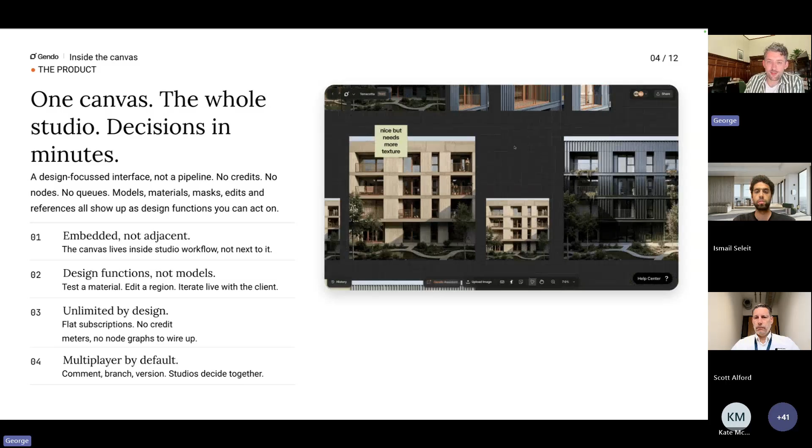As I said, it's unlimited. There's no credits in this. We find that sort of stunts the process. So you can generate as many times as you like, and it's all about working collaboratively in that process.

So again, to talk about the problem, image production can take a very long time, 2 to 3 weeks. It can be very expensive, and then getting people to understand what you're up to is difficult. We already have users who are cancelling other software subscriptions they have to manage this sort of process, using Gendo to replace that. So hopefully cost effective as well for you.

Interestingly, one of our users is now selling the images they make. It's a line item on their invoice saying you've got images as part of your design process. So they're profiting off of a Gendo subscription, which is awesome to see - that people are using it for that actual professional context.

Origin Design Studio is a small studio in the north of England, and I'll show you one of their planning applications where they use Gendo images on their project. So we'll talk about that in a little more detail.

There are lots of AI models out there now. Any of you who have tried will know it's an increasingly explosive number. When we started Gendo back in 2022, there was maybe 3 to choose from. If you look at any of these repositories now, there are sort of 5,000 models that you could be using for any given moment.

So the way we handle it is that we test all these things. Ismail particularly tests all these things and finds the architecturally relevant use cases, and then we train them further to be fit for purpose for those functions, and then we include them in design-oriented features.

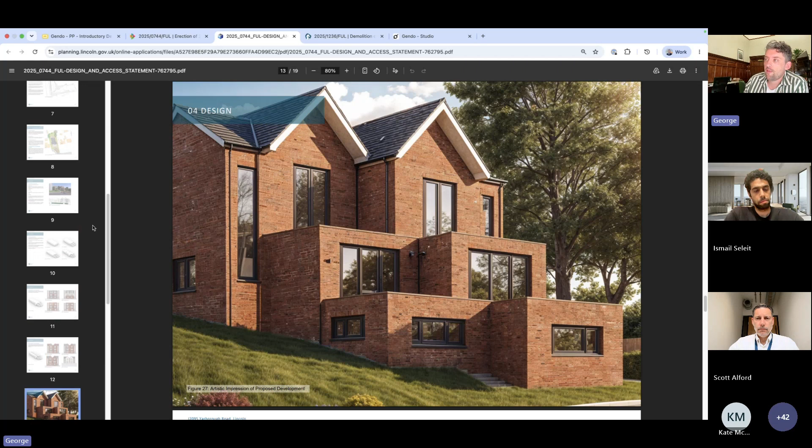The Origin Design Studio told us that this was a contentious project, that they had been in a few meetings with their planning officer and having to go back, make changes, come back a few weeks later to have that conversation. They've done that 2 or 3 times already. And in this final conversation, they had shown them these images as part of it, and that was helping get the understanding and the alignment with the planning officer.

But it was only when they sat down with the planning officer in the room on Gendo and made some changes live, and said, okay, we want to make these changes to the material finish of the facade, what would that look like. Rather than spending 2 weeks going away to redo those drawings, those images, they just hopped on the platform, regenerated it in the room, and got approval there and then. So they saved themselves a huge amount of time just by iterating and using the platform in the room, which was a super awesome use case for us to hear.

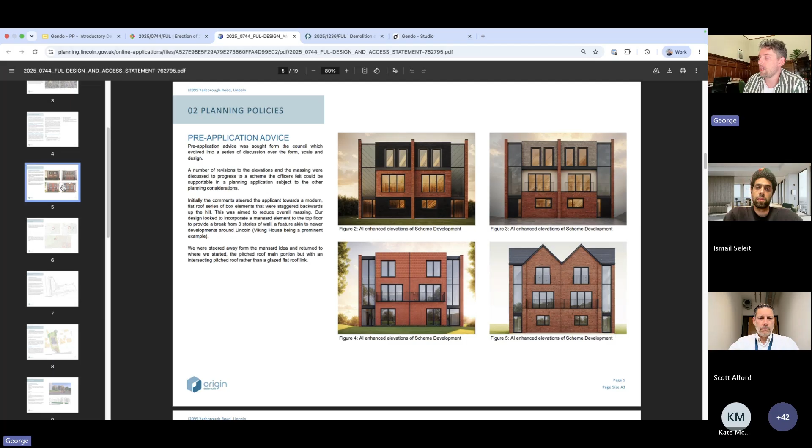Another older application now is a house in Somerset where they had done some concept materials. There are 2 applications, but this first one is not available, let's try a different one... sorry, this was loading earlier. Well, that's very helpful. Okay, we won't look at this one, but essentially a similar story.

They had their applications, they had a perspective view of the building in context and had generated the materiality and the lighting, but the planning officer said that they didn't like the skylight, the window in the roof, so they had to regenerate that image, making that very specific and controlled change, and then resubmitted it, which got them the planning application, and everyone knew exactly what they were approving. So another example of this being a tangible thing in building delivery, not just pretty pictures at the beginning of a project, but something that had impact on the process and the success of this planning application.

I'll pause there and maybe hand over to Ismail, who will take us through the actual platform.

Yeah, thank you, George. It's time to jump into the platform and do a quick demo. I'm planning to do everything live with you guys. I have some prepared assets, but it's always nice to try things live. So before I start, George, Scott, Kate, please interrupt me if there are any questions, or if you have any questions also. Sometimes I get so much into generating things. Please interrupt me at any time.

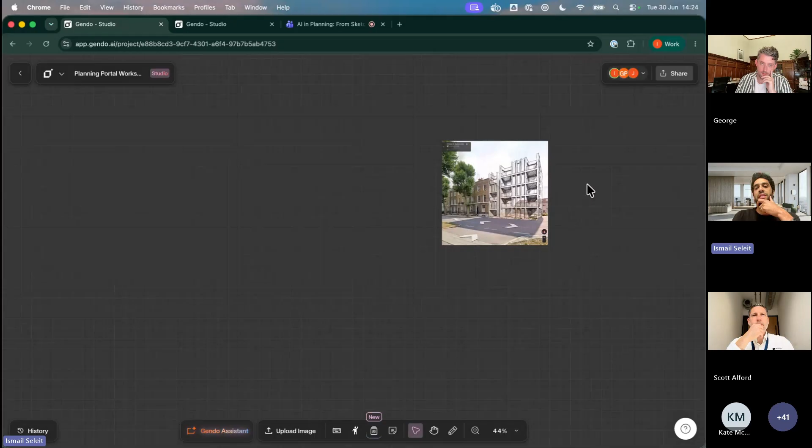As you can see, it's loading now. This is a very speculative image that I made. This is not a real place or anything, but it's just a Google Street View, let's say, of a place where I added like a sketch, sort of tracing paper sketch on top of the empty plot that I have here. And I want to start iterating on that, basically.

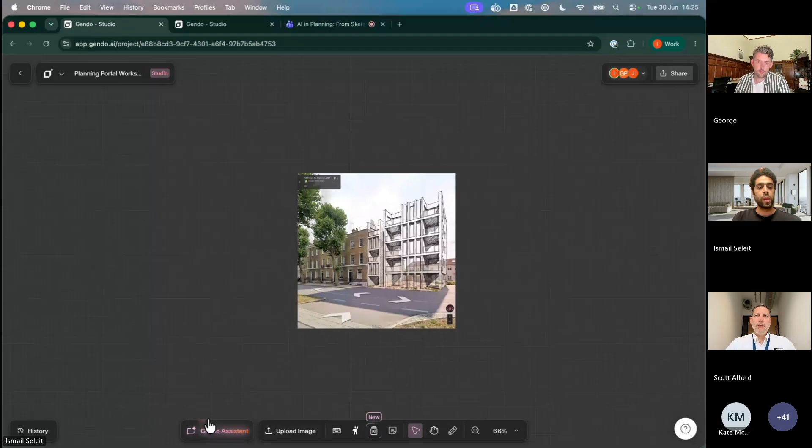So the first thing I'm going to do is I'm going to use the Gendo assistant. If I select the image, we have some contextual functions that I will be going through later on, but I want to start simple. So the Gendo assistant basically is an AI assistant that will be helping you throughout the Gendo interface, but also helping you with like design ideas.

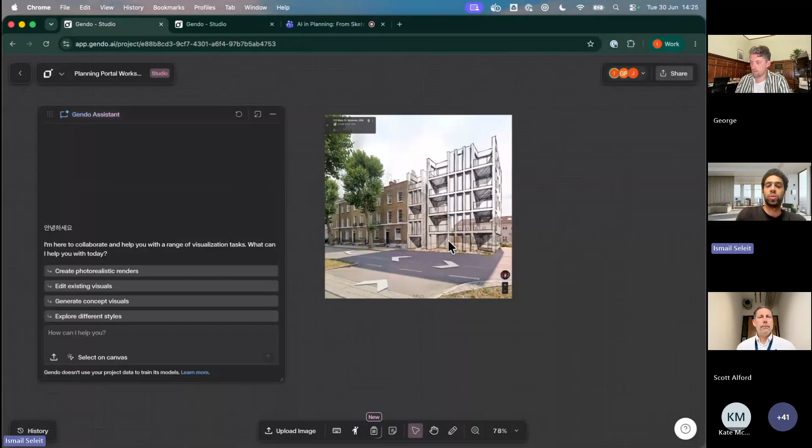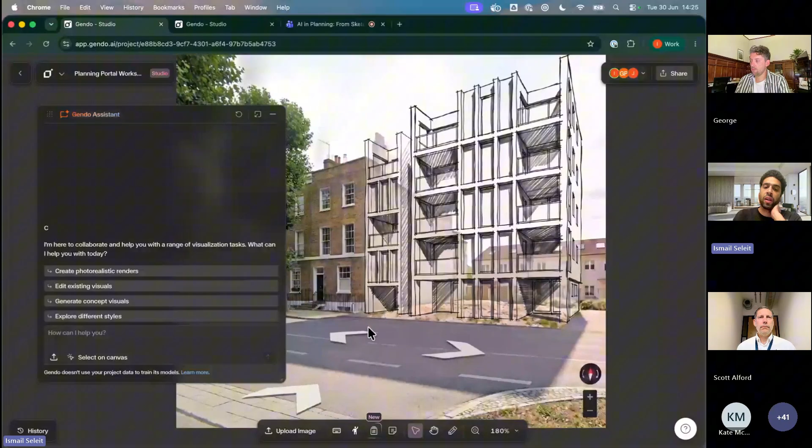So usually when you start these projects, you don't have like a super clear idea about what you want to do. You don't know exactly like what to prompt, which function to use. You just have some design ideas that you want to try out. So for example, in this sketch that I made on top of the Google Street View, I kind of like how the massing looks, but maybe I want to edit a bit the railing, which is kind of random right now. And I want to try like let's say a simple vertical sort of railing here.

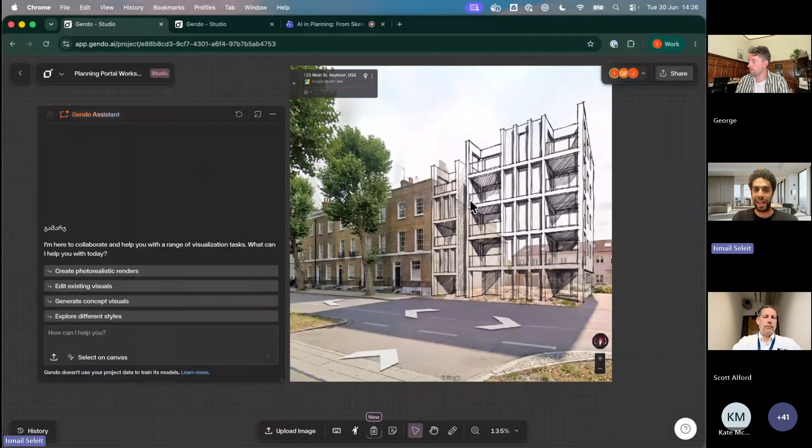So instead of going back and sketching everything, I can try to do these sort of edits with the Gendo assistant. So I'm just going to drag and drop this image here inside the Gendo assistant that I opened. And before starting, I like to give it context.

Yeah, give it context about what I'm trying to do here. So I will just tell it first thing that throughout this conversation, I want to only edit the sketched building while maintaining the sketch style. Yeah, I can see George is already generating some stuff on this board, which is great. So right now I'm just setting the context that basically will help me edit these railings before like jumping into design decisions. I'm just setting the scene for it.

And right now, as you can see, it starts inspecting the image, so it starts understanding what this image is composed of, and it starts suggesting things for me already. So it says, yeah, I understand, but starts asking me what would I like to change about this sketch that I have here, and it gives me some options. Yeah, modify the height, change the pattern of the balconies, add or adjust. I'm not obliged to pick any of these, also because I didn't mention that.

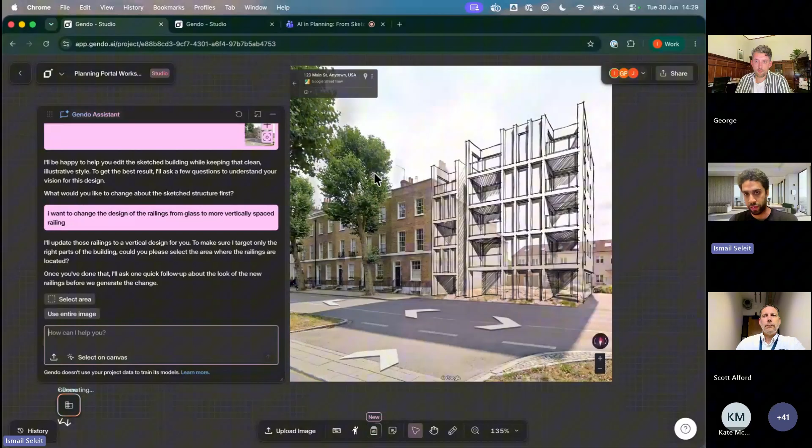This is an important question, because sometimes if for example I'm changing the time of day from day to night, this is an edit on the whole of the image. So I'm changing each and every pixel of the image, let's say. Whereas for this design task, I would say because I'm editing only a portion of the image, I'm going to go ahead and select the area.

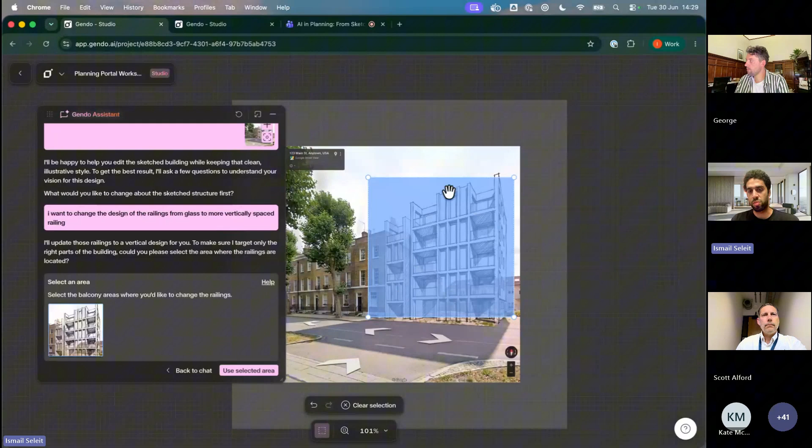So the area is roughly, this needs to be quite rough. It's nothing like precise. It's roughly around this area. I think this covers most of the railings that I have. And I'm just going to click use the selected area.

It's asking me a little more about the division of these vertical railings - whether they're closely spaced, wider, or minimalist. I'll go with closely spaced, but let me hit edit since you can edit these options. I'll add some detail just to make sure they're compliant. The AI won't make them 100% compliant, but at least while creating the spacing it has an idea of the range it should follow.

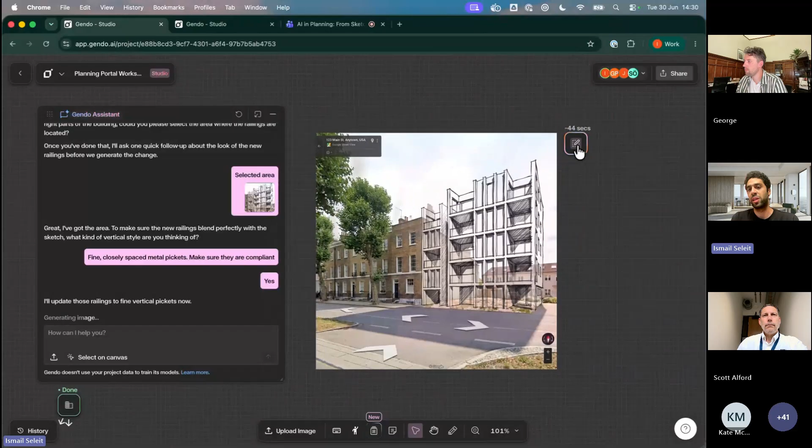So right now the assistant came up with a plan for me to generate. If I'm happy with this plan, which I think I am, I'll just hit generate. And right now it's going to create a task that sends it to the AI model to do this edit.

So just to recap, up until this point all I've been doing is thinking about my design ideas and intentions, trying to communicate them well to the Gendo assistant. I started by adding the image and setting the scene - giving it the context of what I want to do, which is basically edit the sketch. Then I told it my design intention without being too specific. Yeah, I was a little vague. It's done now, but let me continue with the recap.

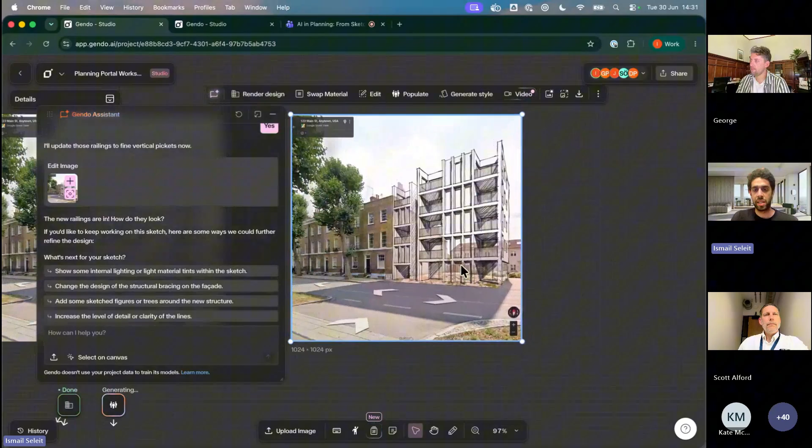So I was vague about my design intention - I just said vertically spaced railing. It came back with some suggestions: first, to select only the portion or area I want to edit, and also how spaced I want these railings to be. I picked an option and added some information for it to give me the ideas I have in mind. As you can see, it edited all the railings to fit my intention while following all the instructions I gave it. So I think we're off to a good start.

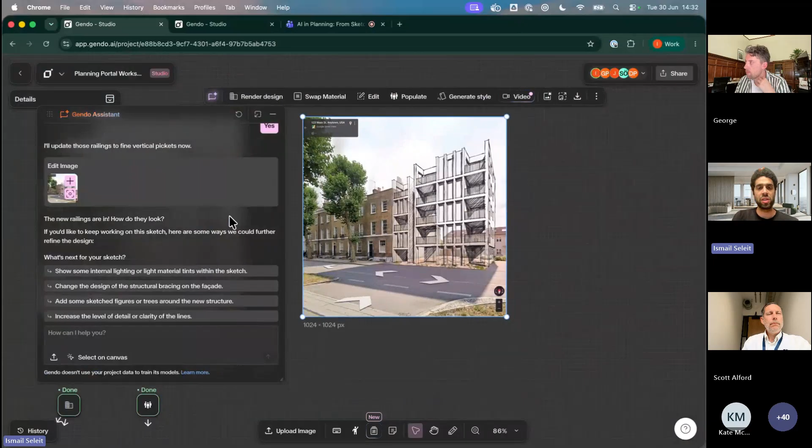I could go a little further adjusting this sketch, trying out other design ideas, but just for the sake of the webinar today, maybe now is the time to actually try to render it and make it a little more realistic.

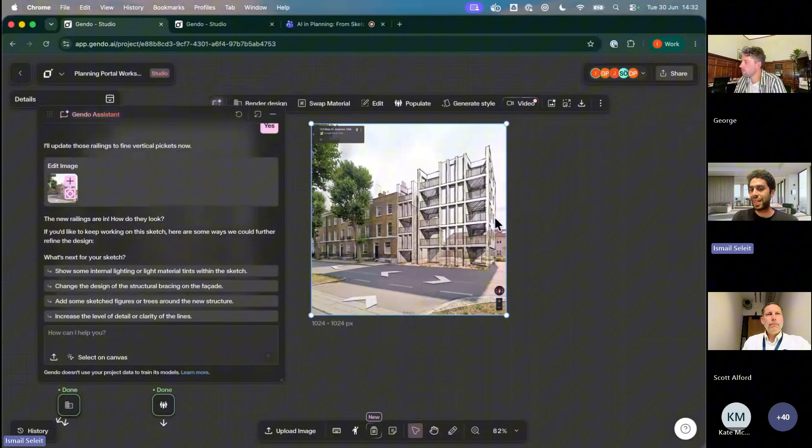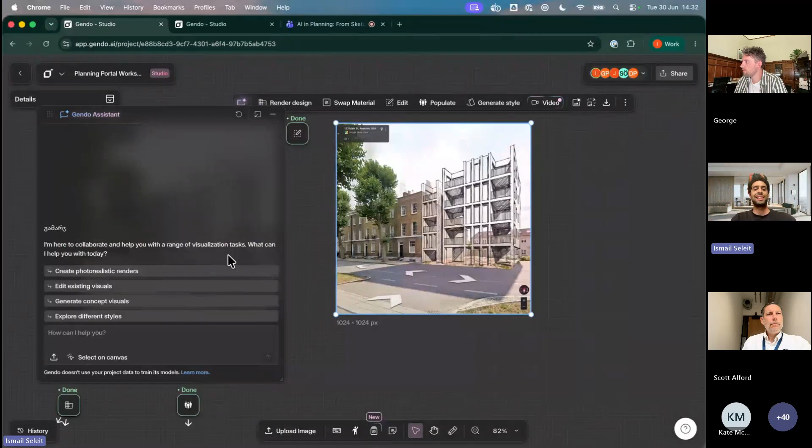Since I'm done with this chat, I'm just going to reset it. I'm done with the editing of the sketch, so I'll reset this chat - it's always good to reset once you're done with a task. Right now I want to render this to be a realistic building inside this context. I also have a material sample, an image of the materials I want to use, that I dragged and dropped in.

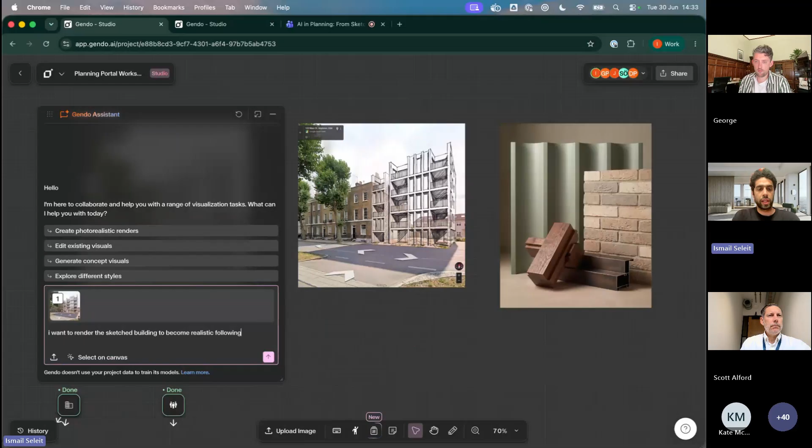So for this task, I'm just going to drag and drop the generated, edited image and tell it the new task. I want to render the sketched building to become realistic, following the lighting and atmosphere of the surroundings, and make sure you capture the design intent. This could be anything, really.

And then, like the previous example, the Gendo assistant starts to inspect the image and tries to understand what's within it, along with my request. It reasons through my request and asks me to ensure the final image matches my vision for the materials and quality. It asks if I have a reference image for that, and I actually do.

So I'm going to drag and drop this reference image in and tell it to use these materials - for example, the green fluted material as the material for railings, since we're doing railings right now. And then I'll send this over.

I think George already finished the project over there - I can see him generating so many things, but I'm trying to take it step by step here. If you have any questions up until this point, please do interrupt me.

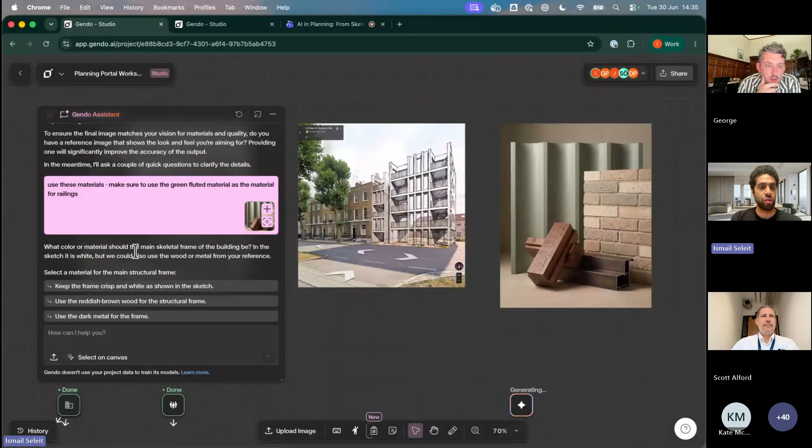And as you can see right now, it's following up with some questions: what color or material should the main skeletal frame of the building be?

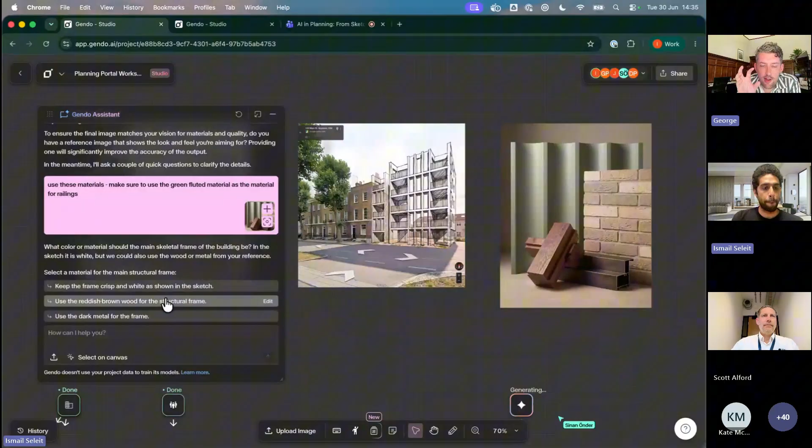A question for you, Ismail, just while that's generating - you've got a great image of an abstract material palette there to apply, but what are the other kinds of reference images that might work well?

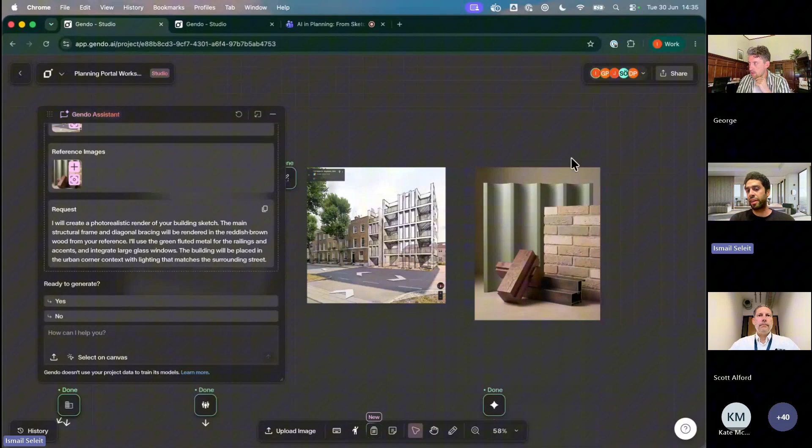Yeah, that's a really good question. So any sort of reference image of buildings as well - the AI model will be able to extract materials and atmosphere from it and apply it to your design. It doesn't necessarily need to be like a material palette. It could be any sort of design reference of buildings, even things unrelated to buildings. If the reference image you want to mimic its lighting or atmosphere or photography style, and it doesn't have any buildings in it, this also works.

Yeah, I'm just going to hit generate. Should have hit generate before I answered the question, but right now I'm hoping it follows the design intent while adding these materials. We will wait and see.

I'm intrigued to see what George has been making. Oh my God, wow.

So yeah, shall I, maybe George, you can walk through what you did. Yeah, so I did a couple of things. I had an idea in my head about the kind of building I wanted to see, but I didn't have a reference image, so I described what I wanted to get something close to what I was imagining to be my reference. I used the text to image tool, which is great for those early concept images, but it's very hard to prompt a whole building. So what I wanted was a medium density block of flats with a gradient flint facade, essentially. So I was pleased with that outcome.

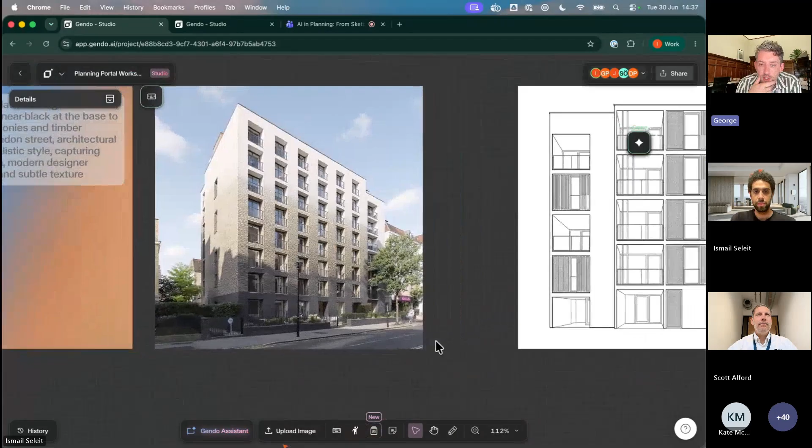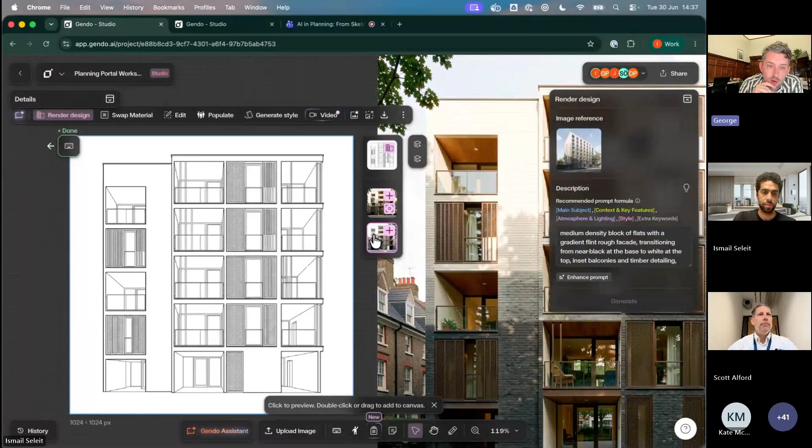Then took one of Ismail's inputs - instead of a sketch, it's a screenshot of a CAD model taken from Rhino, I think in this case - and then used the reference image and the same prompt again to generate the next image. Hopefully it's clear that the architecture is consistent, all of the openings, the details are correct and reliable with the input. And you can, as Ismail's showing, compare those in the preview of the images. So we give two options because AI is always a bit random and one of them will be preferred. So I preferred that one, and I added that to my canvas.

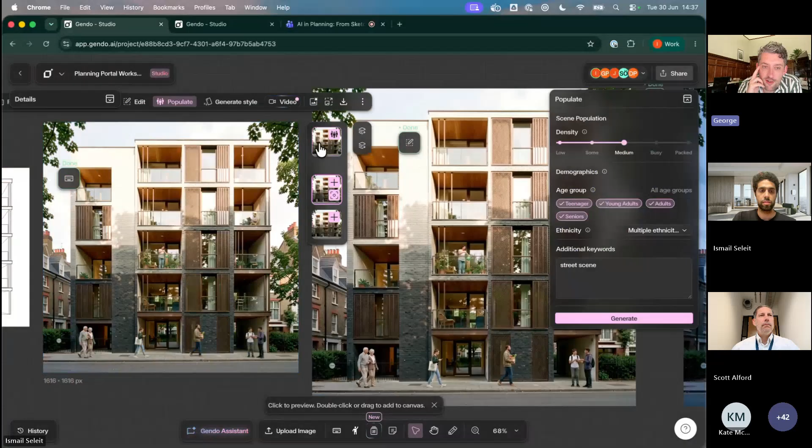And then I wanted to see some life, some activity in there, so I added some people - a few people on the balcony with their plants, some people walking past the building in front - just adding that activation there in a residential setting. And then I wanted an evening scene, so I asked it to use chat to change it into a night view with warm interior lighting and cool exterior lighting. Again, each step the architecture remains the same, only the change sort of happening.

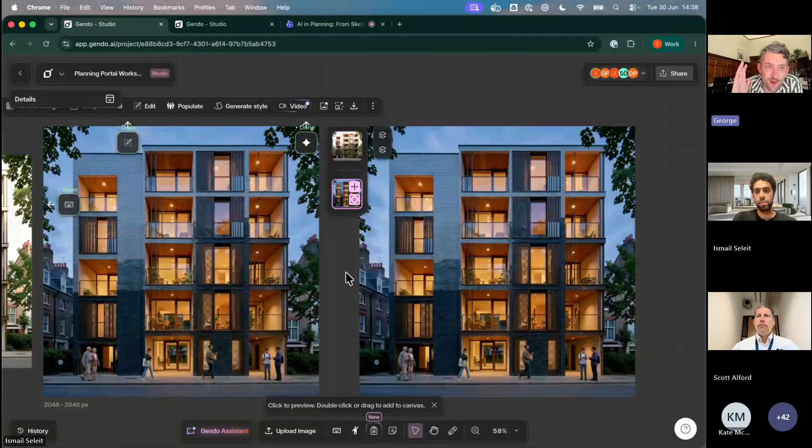Yeah, wonderful. This was extremely fast, I did not expect that. Well, it's easy when you're not presenting. Yeah.

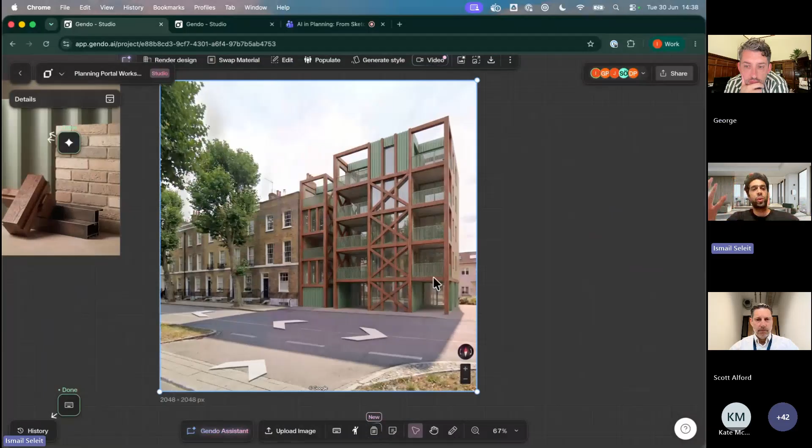So yeah, back to our design. I tried to do something, but I don't like these X's. I created it based on this X, I think, that is here. So that's not a problem. I mean, the whole idea of this is that it's an iterative process and it will suggest things for you that sometimes you will like and sometimes you won't, which is a great way of showing this live because you will get some ideas that maybe are not what you expected or not what you liked. So this is not a problem. I'm just going to select the image.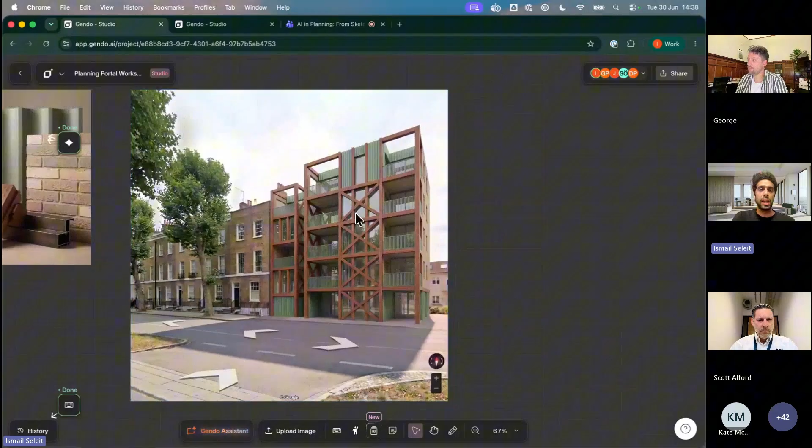I mean, I could continue also with chat because I have all the context and tell it I want to remove the X's. So maybe this is what we should do - I want to remove all the X, timber frames added to the design.

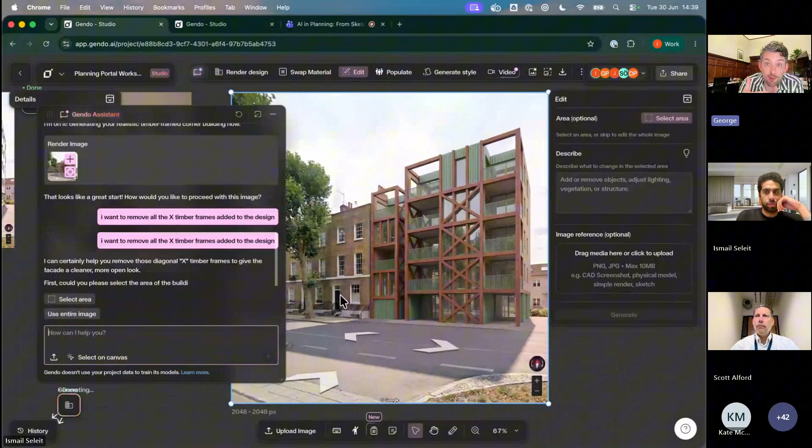Let me iterate that, sorry. So maybe while Ismail's generating that - chat is a really flexible feature, and as you're saying, very conversational. It uses our features for you, so it's asking these extended context questions and prompting Ismail to provide more context so that it can apply the specific changes you wanted. That also means it's more creative because it's interpreting what you're saying to fill those features in, as we're seeing. Whereas those features in the context bar are available for you to use directly, which gives you another level of specificity and control.

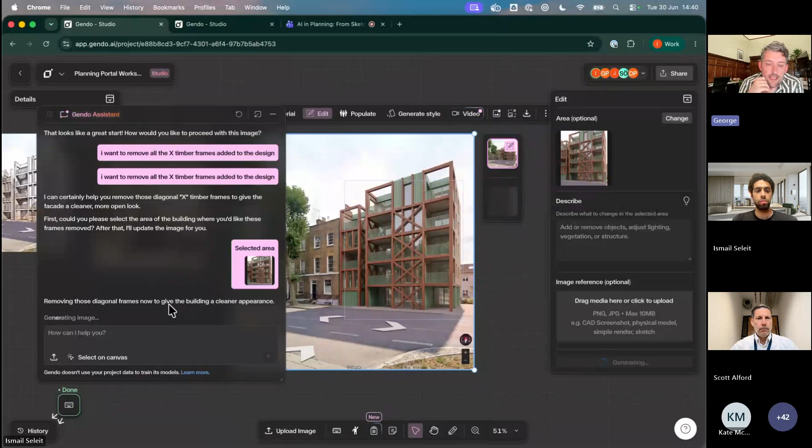And we always assume the iterative design process - that even if you did get the perfect image back, you would see something and think, oh, well, that's interesting, I want to try this out. That's not how I expected it to look, even if it was correct. So hence the sort of Canvas interface, so that you can keep track of all these decisions and experiments that you've tried as you're working.

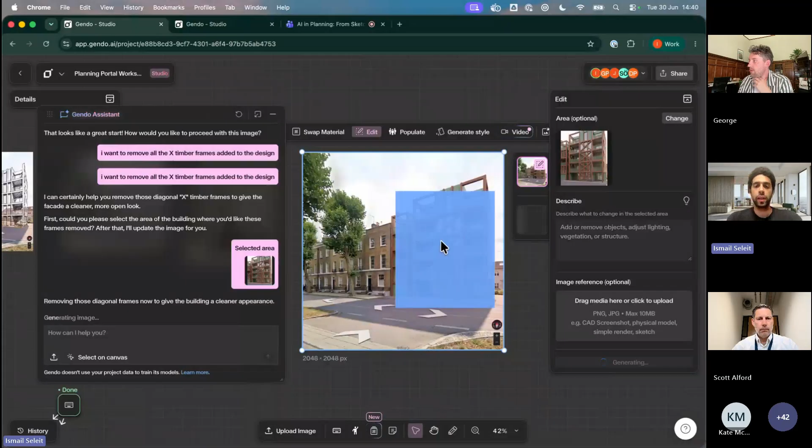So to recap what I did: I told it I want to remove these X timber frames, and it asked me if this edit was a regional edit on the image or on the full image. I told it, yeah, it's only in this portion.

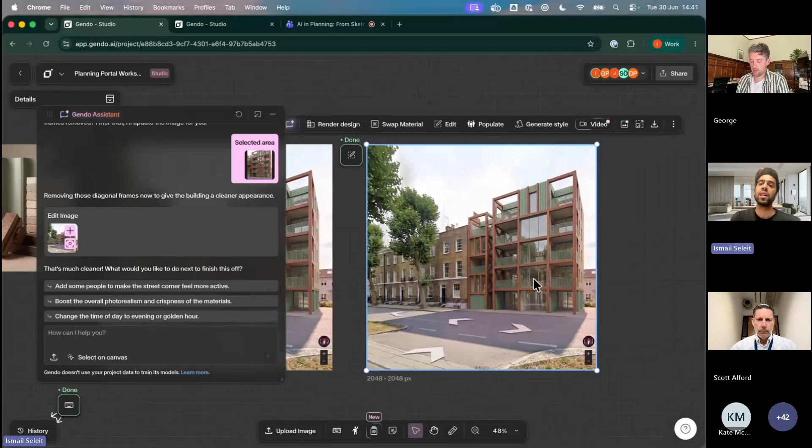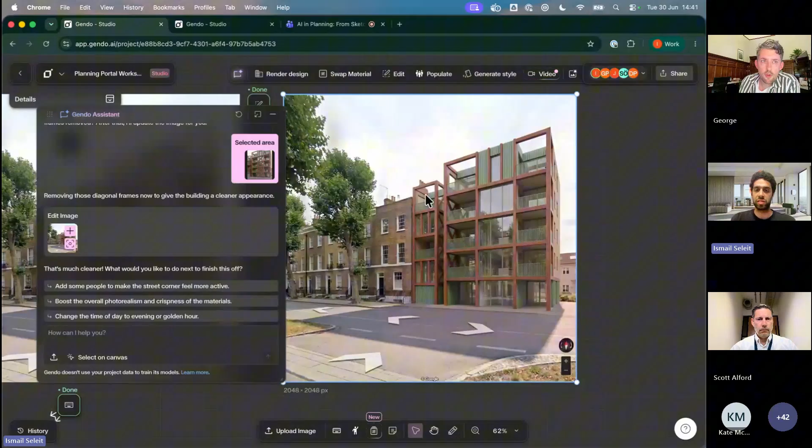Let's see, right now it's editing it. After this step, it removed both the X's and the vertical ones, which I think looks fine, looks better now. I'm not going to spend a lot of time trying to get the perfect architecture look, I just want to show you all the different use cases and tools.

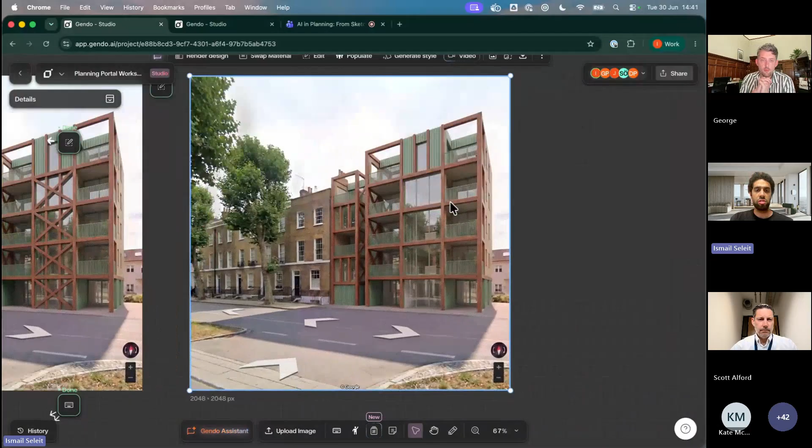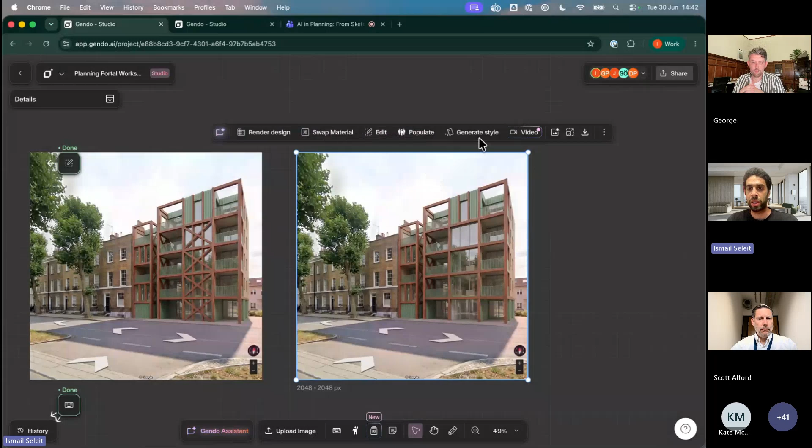So when you select any image on the canvas, these contextual tools will appear for you. These are image to image tools that you can use - you can use this image as an input to render design, swap a material, edit it, populate it like what George showed down there, generate a style, or generate even an animation of this.

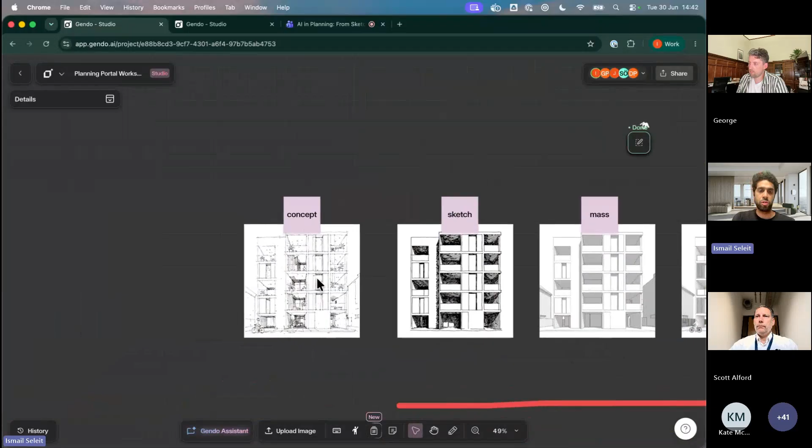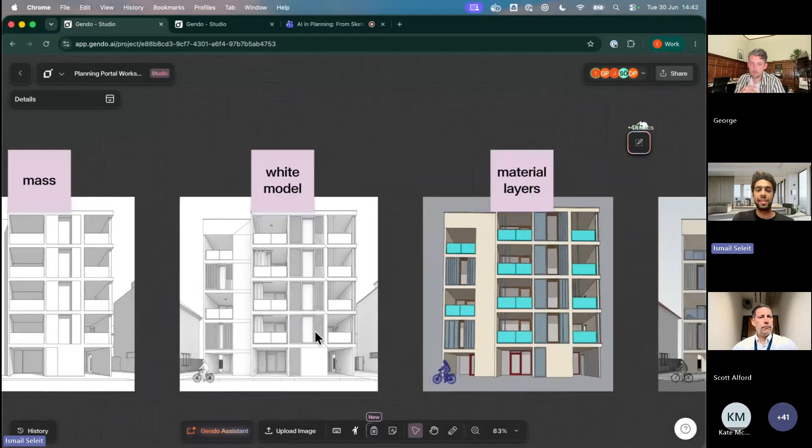I'm going to start with the first tool, the render design, which can take any sort of design intent input - from a very conceptual sketch about your idea, to a more precise one, to a massing, a simple massing or a more detailed one with some layers for different materials, applied textures, a CGI, or even an elevation drawing. All these inputs the render design can take.

What the render design function tries to do is take these inputs and make them more realistic and photographic, feel more like the space. So I'm going to do a very simple prompt here.

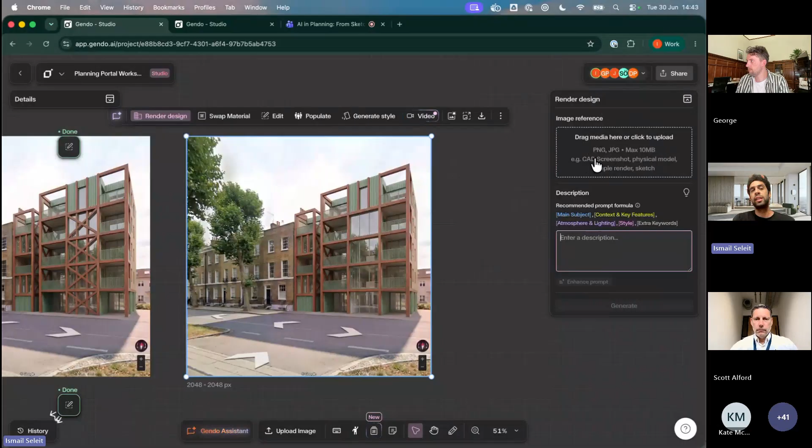When I press on render design, I'm greeted with this panel that I need to fill. I have up here an image reference, which is optional - either I have an image reference I want to follow, like what George did down there, using this reference which made this nice gradient of the bricks.

But for this task what I want is actually just to make it feel a little bit more realistic, while also removing the Google Street View annotations, hopefully it is able to do that. So: remove all Google Street View annotations and render - let's call it transform - this image into professional architecture design photography in London.

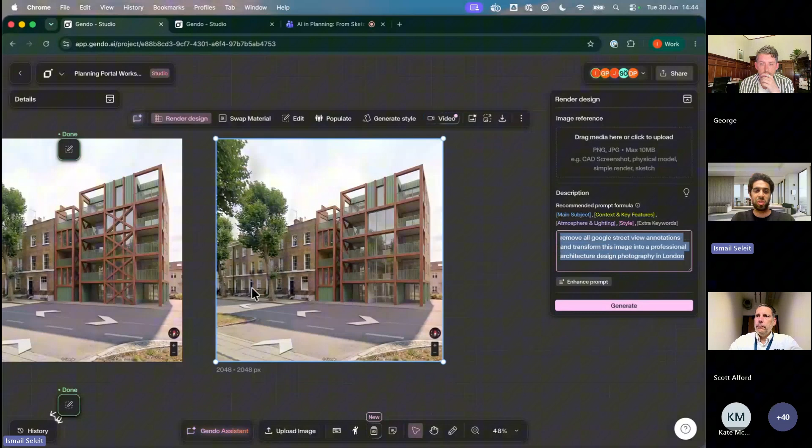I'm just going to give it some context so the lighting choices could feel more contextual. Again, I'm not really worried about this render because the process is very iterative, so I just want to get something through and I can take it from there. I'm just going to hit render design and it will give me two options of a hopefully much more photorealistic image of this design.

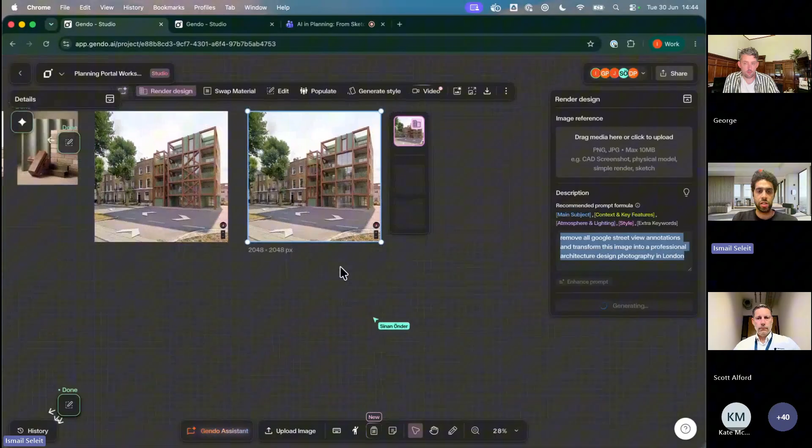While it's generating, maybe George you can tell us what you've been up to. Yes, I'm just trying one of our new features where you can turn images into videos. I've taken this evening shot and used our video tool to do a still - I'm hoping to see people start to move around the scene, but the camera otherwise won't really move. Maybe Ismail, it's worth flashing up the material catalog for a second too.

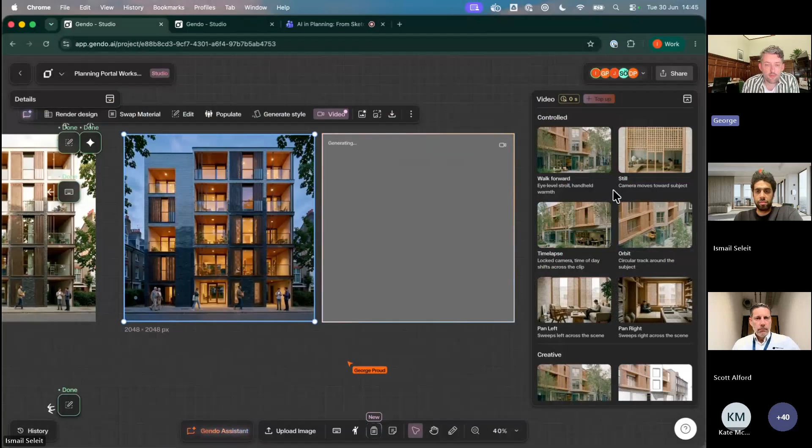Which, as I mentioned, is our partnership with Material Bank. These are all real products, actual things you can specify. You can click and drag and add them to the canvas and use them as references for changing materials inside of the image. You can also click through to Material Bank proper to see the technical details of that material and the manufacturer, and if you're in an eligible country, which the UK is, you can order a free sample of that physical material and get it delivered in 24 hours.

Really pleased with the partnership with them to ground this in actual, real world things. So excited to have all of their EU materials on the platform. You can search by name, category, or color, and get to the technical detail as well as the contact details of the rep for the manufacturers if you're interested. Excited to have added that in the last few weeks too.

It's really important that while you're iterating, because AI tends to make up materials a lot, you stay grounded in real world materials. This material catalog is such a good addition to making the design much more grounded and feasible.

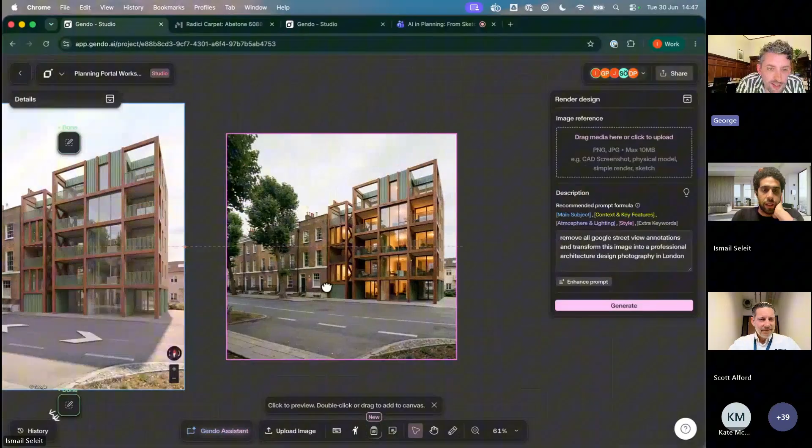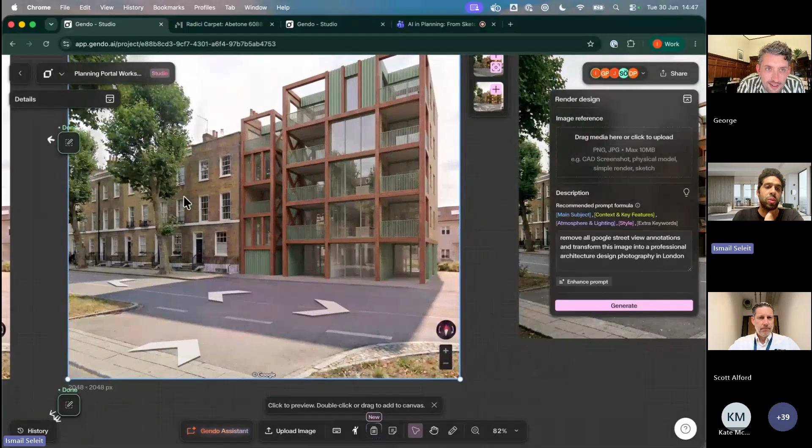Let's see, the two images are actually quite nice. I like this one more. Let's see, yeah, this is also quite nice. It feels like London also with the overcast sky. Yeah, nice, I'm impressed they got rid of the Google stuff. As you can see, it tries to add much more realism. Here this looks like a Google Street View sort of screenshot, while now we are jumping a bit more towards realism. So this is like we've reached a nice point.

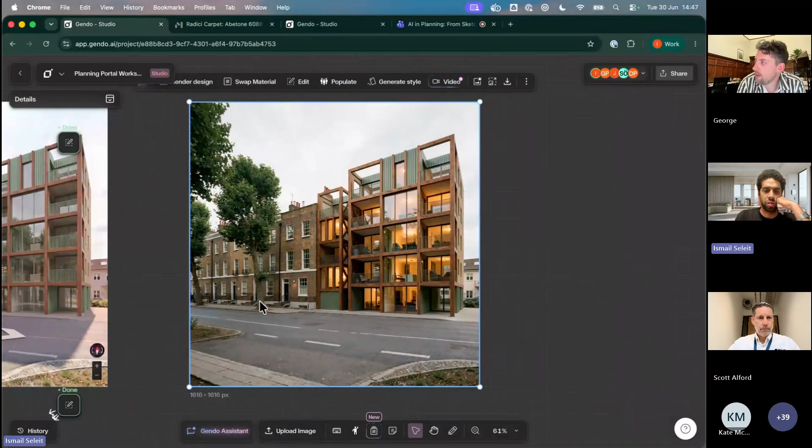Right now, maybe what I was thinking is that we could swap some materials. We could use the material bank to change the material down there. I don't know, does anyone have a preference? George, maybe, do you have a favorite material we can try?

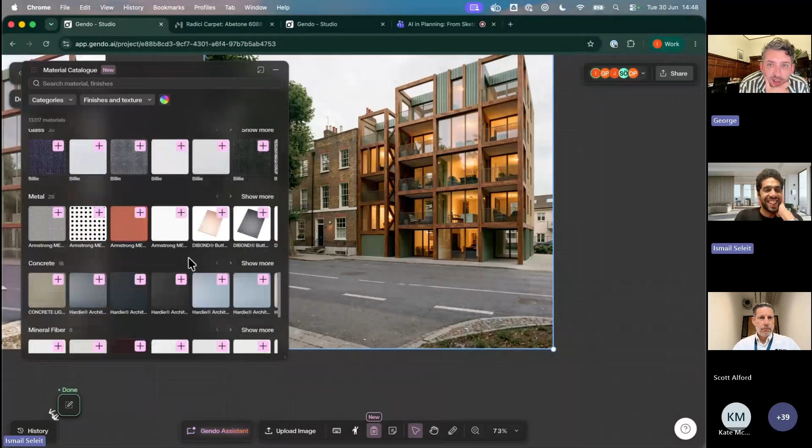Corten steel, maybe? Yeah, I love a bit of Corten steel. You can't go wrong. I mean, we're doing quite well on the muted tones there. Yeah, okay, great. I didn't know they'd have that in there. There's 13,000 materials on there, so I haven't looked at them all yet. All nice.

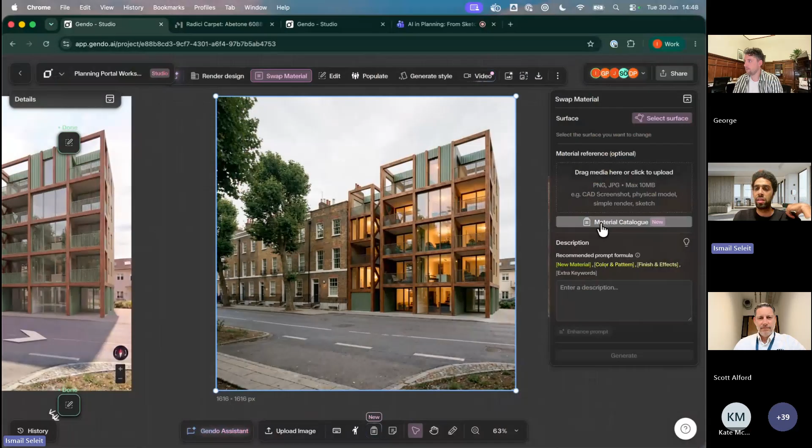Right, let's try this material out. So what I'm going to do is select the image that I generated here, and then hit the swap material. The swap material allows us to select the surface we want to change the material of and use a reference image where you can directly load the material catalog or just drag and drop it inside.

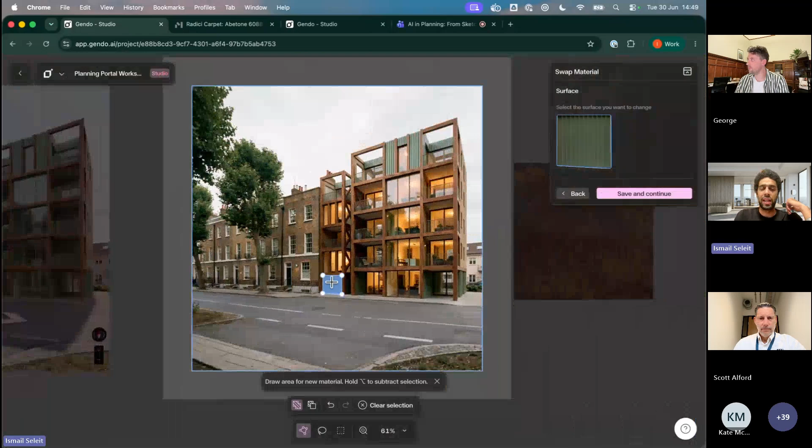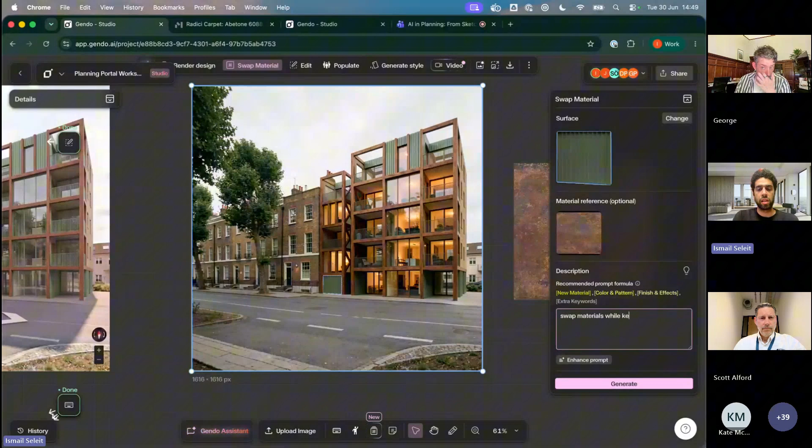So I'm going to start by selecting the surface. As soon as I select, I can zoom in and do the lasso selection. I'm just going to click four points. It doesn't need to be perfectly aligned, but it should follow the area you want to change. I'm going to save, then drag and drop the reference image in, and you have an optional prompt to add. If you just want to change the material without any prompts, right now we have enough information, but for this example, I want to say swap materials while keeping the fluted geometry.

Let's see, I'm going to hit generate. And while it's generating—I think your video is done, yeah? Yes. Let's see, so it's the still preset.

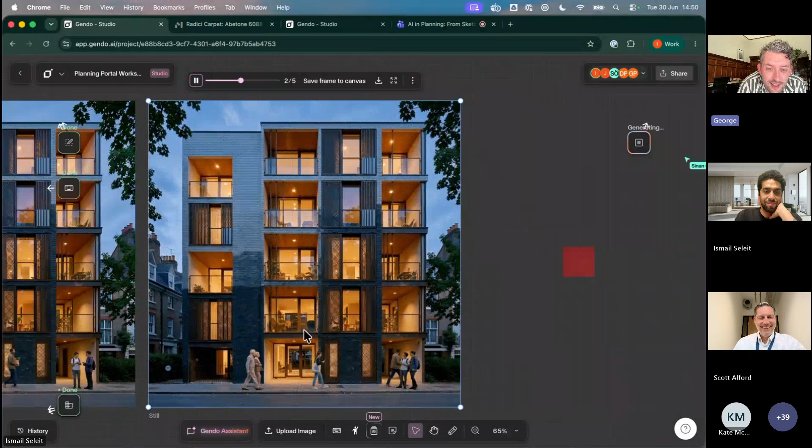I can go through the video a bit more also, but as you can see—yeah, go ahead. Trees wafting, people walking, camera nice and still, so a good bit of activation and detail, but again architecturally consistent. Nice, pleased with that.

You can also expand the video to have it focused. There's a really nice feature that maybe works better with some of the other presets, which is save frame to canvas. So if you generated a video and you like one of the frames, you can stop wherever you want and save this frame as an image to the canvas. Right now it added this image to the canvas, and then I can start working with this frame in Gendo with all the functions that we have.

I think my material is done. Let's see, Corten.

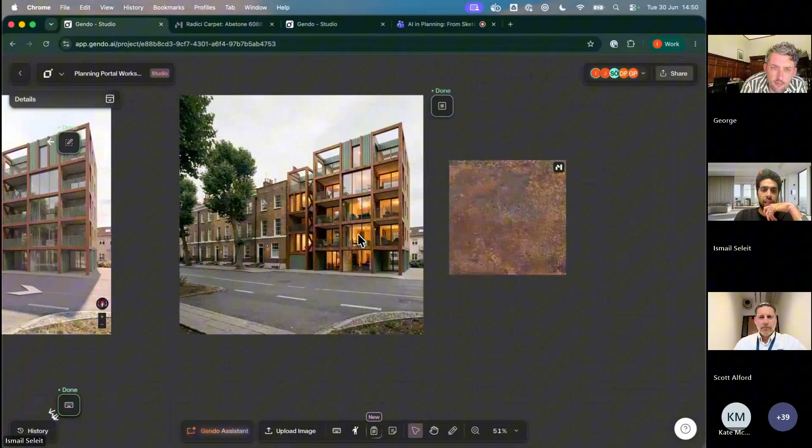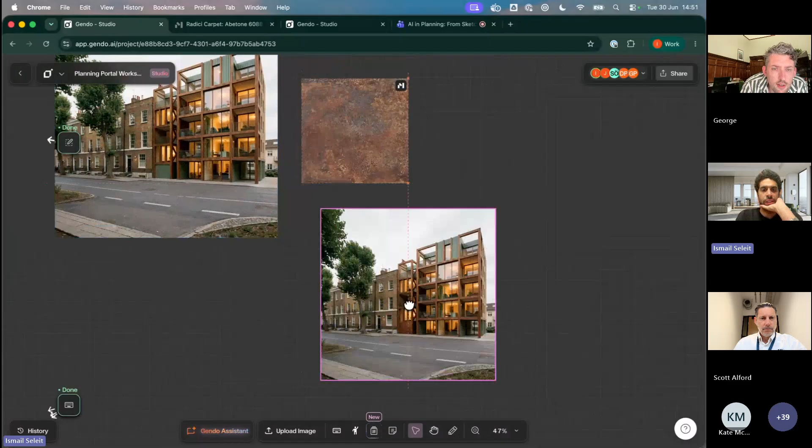Yeah, I can't really see it. Let me check. I think it's still loading. Yeah, the internet's being a bit slow. Oh, there we go. So that's some nice Corten down there.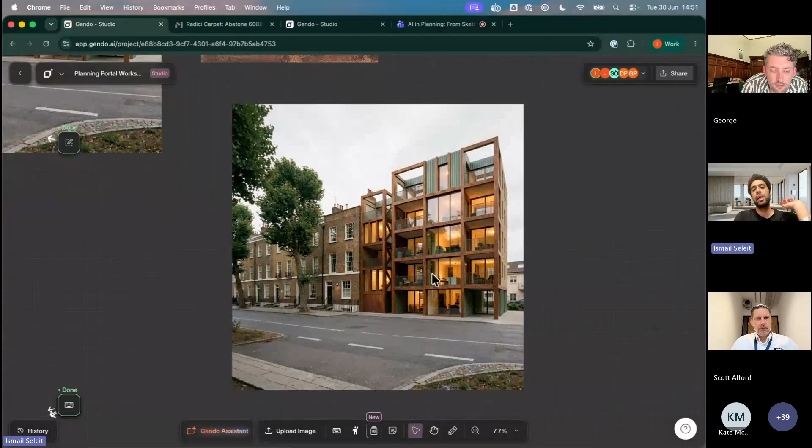So this is very regional, let's say, this edit. It goes and edits only the surface that you have selected. If, for example, I want to change all the green areas, the green material, into Corten steel, I have two ways to do this, either by going and actually selecting multiple things one by one. Or for this task, it would take me ages to do that.

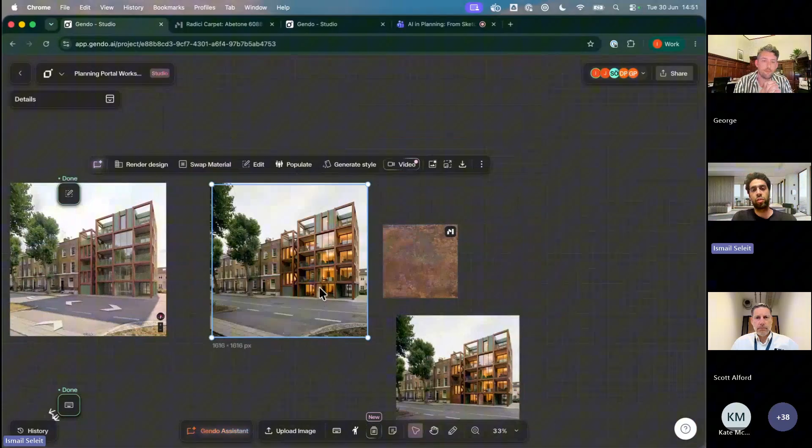So for this task, the Gendo Assistant or the full edit could work as well. Let me run it also through. I'm going to go to the next function, which is the edit. Right now, this is similar to the one we did with chat, but it's the one where you have the form itself, the panel. So the first thing it asks me is if I need to select an area.

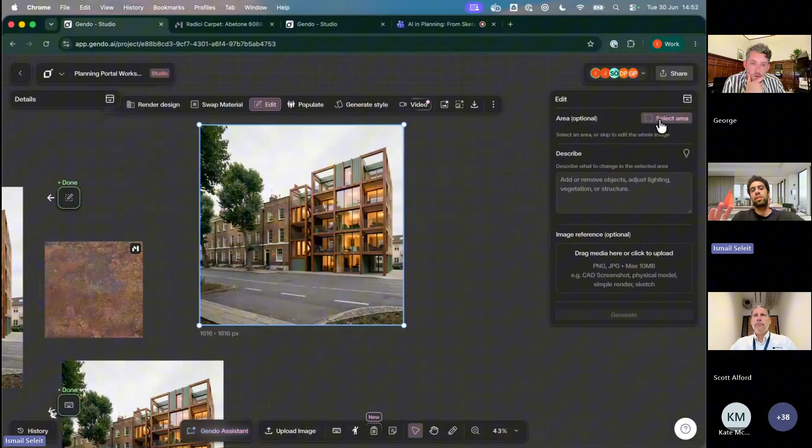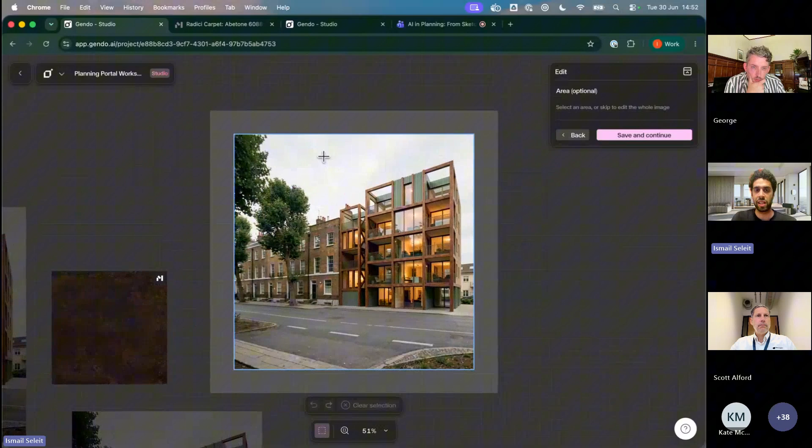So you need to just give it some context about the area you want to select. It's not as precise as surface selection like with the swap material. It's more giving the model context of the area that I want to change in the image. So you don't need to be precise at all with this. It's just giving a rough context about the area you want to edit, and then I describe what I want. So I want to swap all the green fluted material with the Corten steel material from the reference image.

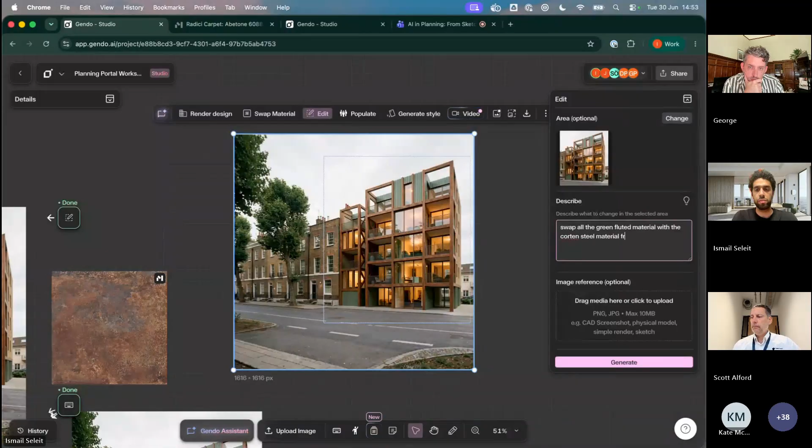And then I will just drag and drop the reference again here. I think, please Scott and George, stop me if I'm taking too much time. I get too much into little details. If you hit generate, I can maybe round off as conscious of time.

Yeah, and maybe zoom out a little. I mean, Ismail's done a great job of taking us through the features on the platform and focusing in on one particular use case. But we tried to show a variety of inputs so that you can use whatever it is you've got, which can be a napkin sketch or a developed 3D model or a photograph, whatever it is you have to hand that has your design in, and that you can then iterate through all of these tools architecturally focused to arrive at an image that you are happy with, that helps you with your design and iteration process.

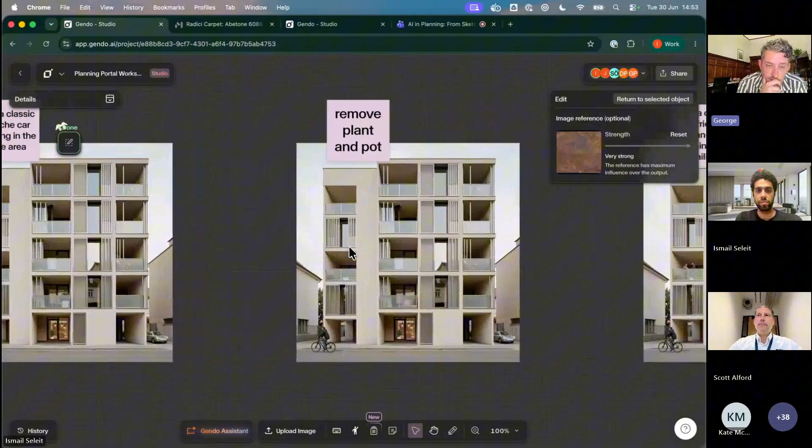So, referring back to our previous examples of the planning applications, obviously the outcome there has been the sort of image to arrive at a final proposal, but it is as much about the journey and the iteration as it is that final asset and outcome. So hopefully that's clear in this sort of canvas layout.

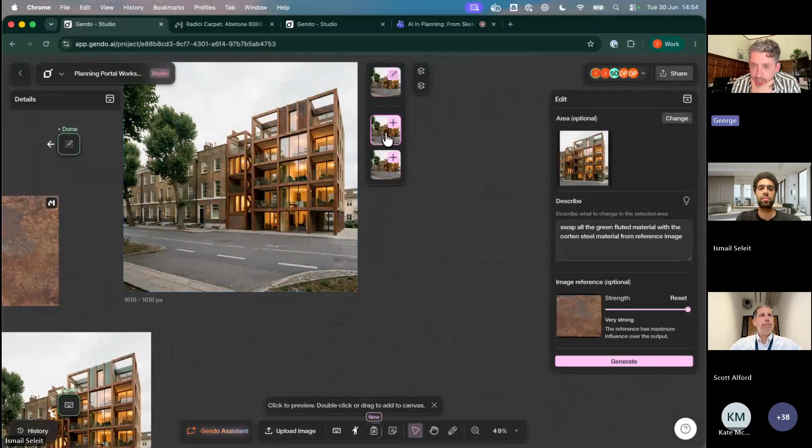We've got a couple more minutes for questions. I can see a couple in the chat to talk about price. So as I said, it is free to just sign up and have a go. There's nothing stopping you from just trying it out with your projects, your actual assets, and see if it is possible to do what you want to do with it.

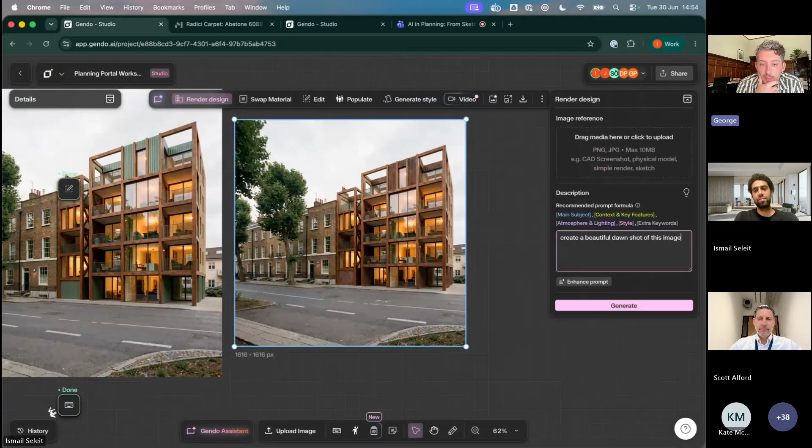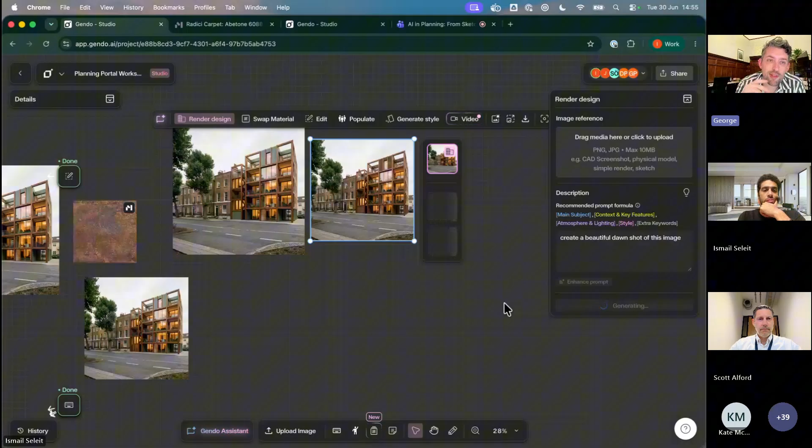Please also get in touch if you struggle. We are always interested to hear any feedback you may have. As I said, it is unlimited, so you can generate as many images as you want. That means we have a seat-based pricing model, assuming one seat is one person generating lots of images. So it starts at £79.99 a month, which gets you 5 seats of people. We're aware there are some smaller practitioners for whom that is maybe expensive, and 5 seats is too many. We're thinking about how to best handle that. Hopefully you appreciate the unlimited setup is a difficult one for us to balance there. So please bear with us if that's not something you can handle at the moment. But as I said, you can use the free plan, so please do just have a go.

Another question about 2D to 3D and 2D elevation plans and 3D output. So, no, not 2D to 3D. Again, we assume you, the architect, the designer, are in control of that 3D asset and object, and that it's part of your CAD or production process to manage that. So we leave that with you. This is a purely 2D to 2D thing. We are constantly testing and looking at models that do 3D.

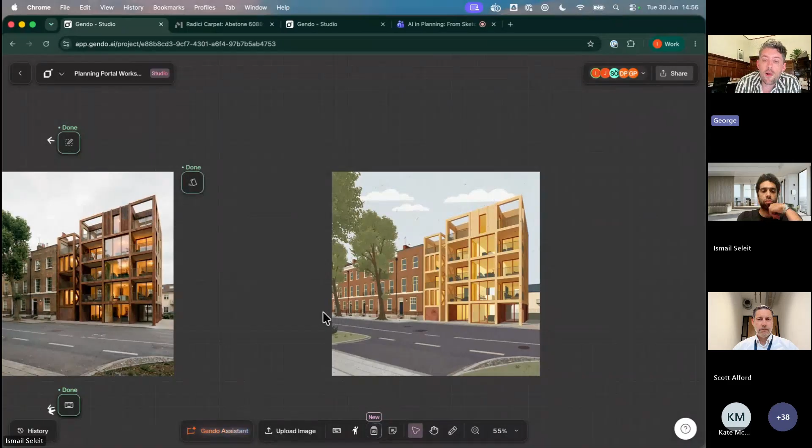So we may do that in the future, we're constantly keeping an eye on it. In terms of elevations, you can use elevations - some of those examples I showed you from Origin Design Studio had elevations as inputs. We typically assume a perspective view, so plans won't work unless what you want is a textured plan. Going from a plan to a 3D thing, there's a lot that happens in the third dimension, so that's very tricky and hard to get accurate and consistent with your design. So again, we assume a sort of perspective view.

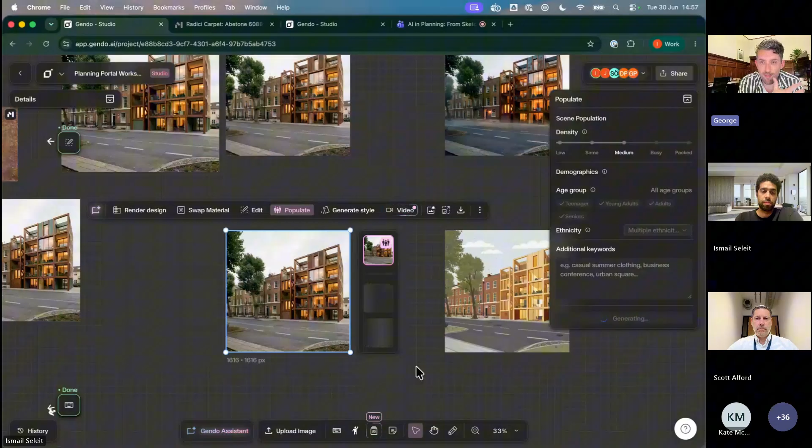Another very timely question: is there any deterioration in the images moving between the editing stages? Yes, this is a fundamental tech problem - you'll experience this with any of the model providers. Basically, if you edit the same image multiple times, the image quality drops. This is something we've been working on for a while, and Ismail has found a very nice solution for it. I think in the next couple of weeks we'll be making a change to the platform, which means you'll be able to edit many, many more times before you notice any degradation. Typically, if you use the features directly, degradation isn't as much of a problem because you're making very specific, controlled changes. Where you use chat, you're regenerating the whole image, which adds more of this error and degradation. So yes, a solution should be out in very short order.

Just adding to that - using the box, the edit selected feature also does not touch anything outside the selected area, so you won't get any image degradation there. As you can see, nothing happens here to what's outside the box.

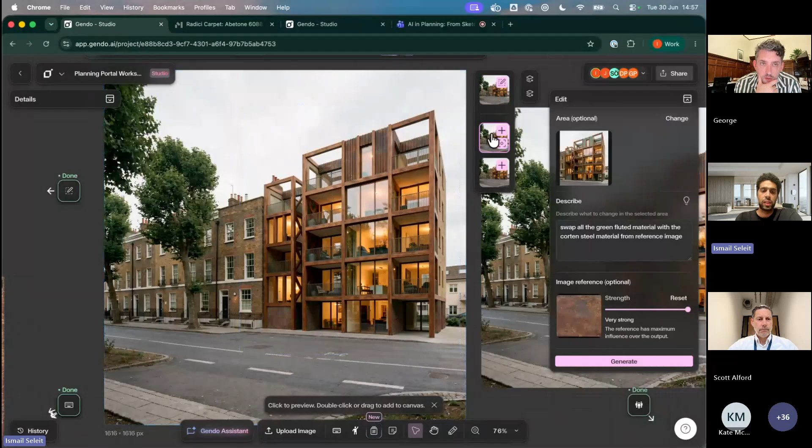Yeah, clicking through them. Yeah, right now it's a way to go. Yeah, perfect.